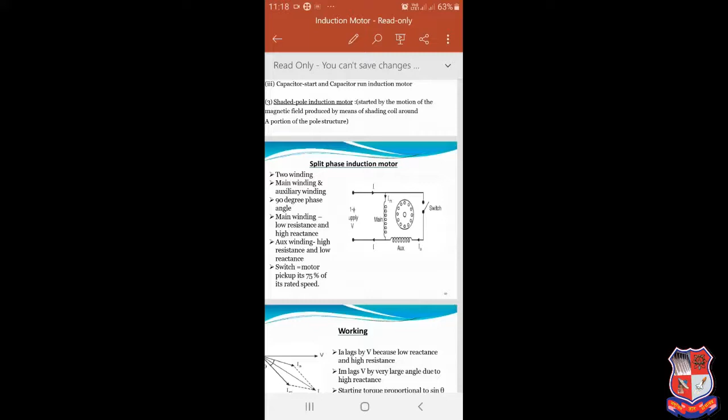The main winding is permanently connected during the operation of the machine, while the auxiliary winding is disconnected after reaching 75% of the rated machine speed. That means when the machine reaches 75% speed, the auxiliary winding is removed with the help of the switch.

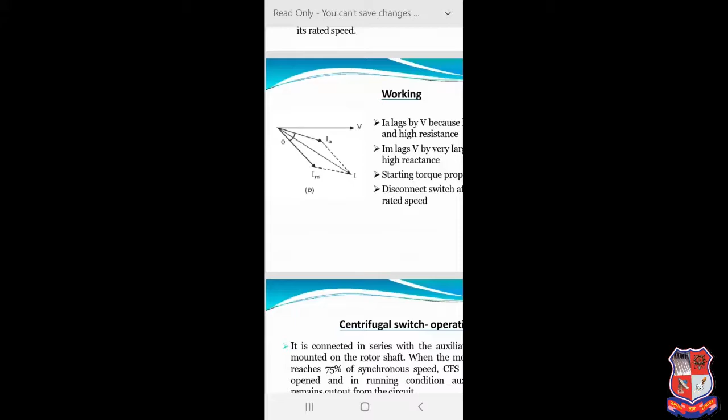Now here you can see the phasor diagram. The IA current, that is the auxiliary current, lags the voltage V slightly because of the low reactance and high resistance. IM lags V by a very large angle due to the high reactance. The starting torque is proportional to sin theta.

The disconnect switch opens after the speed reaches 75% of the rated speed. That is the centrifugal switch operation, as I told you. Now the characteristics of the split phase induction motor.

The starting torque is 1.5 to 2 times the full load torque. Starting current is 6 to 8 times the full load current. Operating power factor is 0.55 to 0.65. Here you can see the power factor of the induction motor is low compared to other motors.

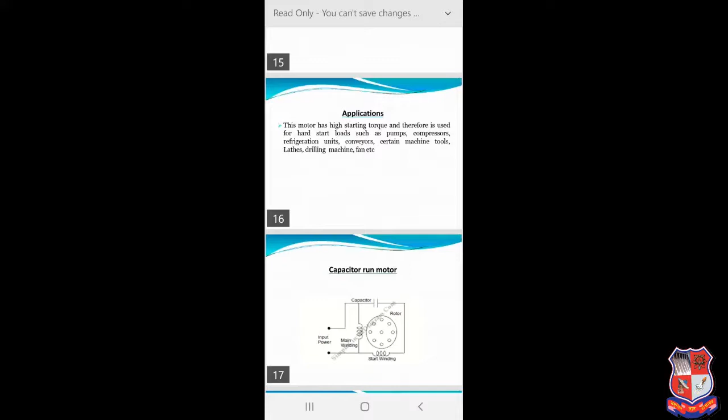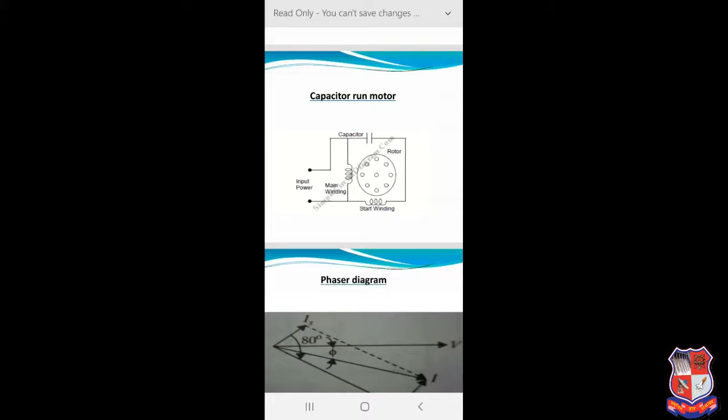Now the third type is the capacitor run motor. Capacitor run motor, you can see the diagram. The difference between the capacitor start motor and capacitor run motor is that in this motor the capacitor is continuously connected during the working of the motor. The capacitor is connected in series with the auxiliary winding.

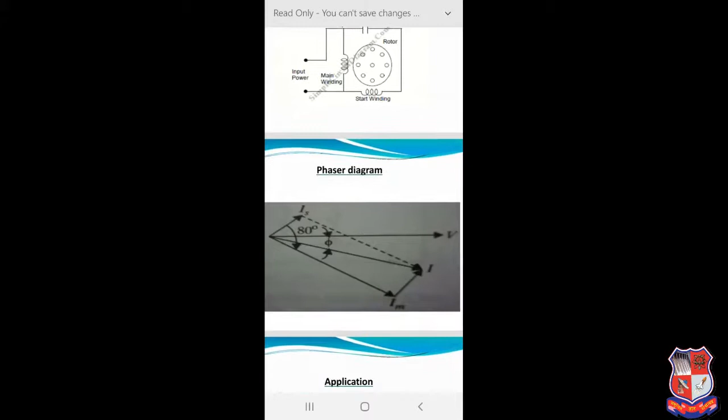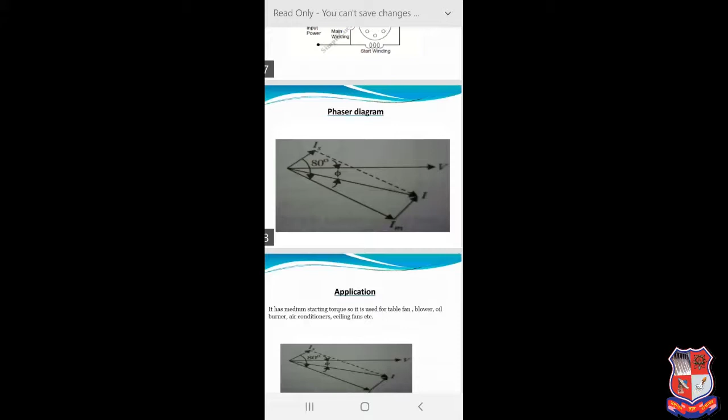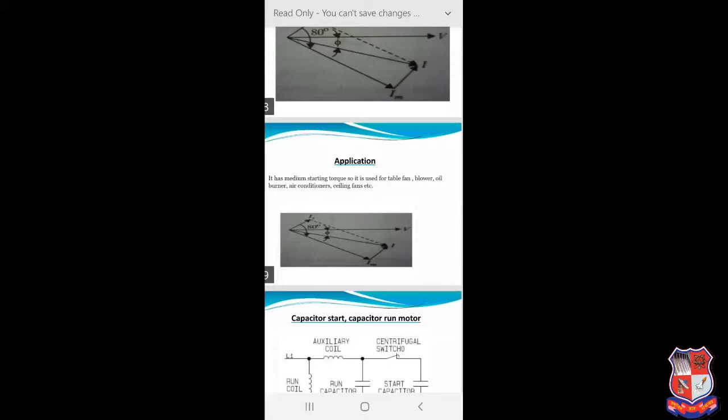Here you can see the phasor diagram. The starting winding current leads the voltage, and the main winding current lags the voltage. The angle difference between IS and IM is approximately 80 to 90 degrees. Now the application of this machine: it has a medium starting torque, so it is used for table fan, blower, oil burner, air conditioner, ceiling fan, etc.

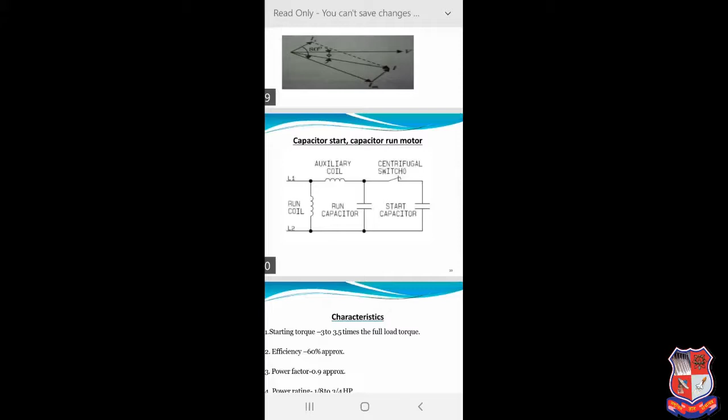Now the fourth type is the capacitor start, capacitor run induction motor. You can see the connection diagram. Here we use two capacitors: one for the starting purpose and another for the running purpose.

The characteristics of this motor: the starting torque is 3 to 3.5 times the full load torque. The efficiency is 60%. Power factor is approximately 0.9. So by using two capacitors, we can improve the power factor of the induction machine. The power rating is 1/8 to 3/4 HP. Pull out torque is up to 60% of the rated torque.

Now the applications: it combines the advantages of the capacitor start and the permanent capacitor motor, and it is used for hard to start loads such as compressor, refrigerator, pump, conveyor, etc. These motors are often employed where quiet operation is required, such as in hospitals, studios, etc.

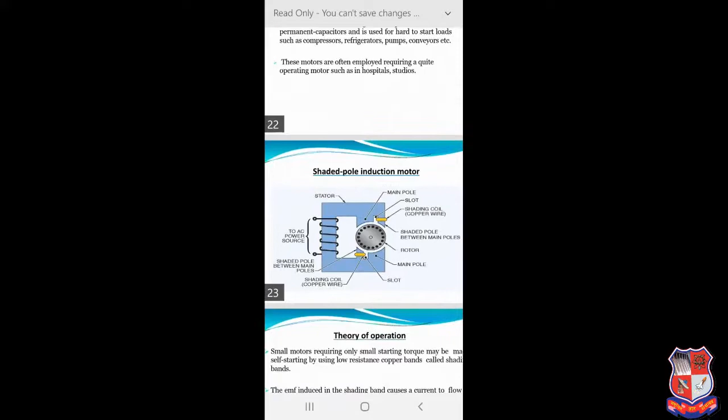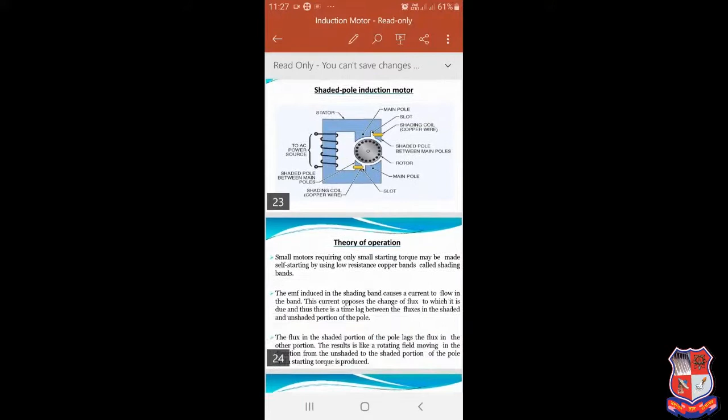Now the fifth and last type of machine, that is the shaded pole induction motor. You can see the diagram over here. In the shaded pole induction motor, a small motor requiring only a small starting torque may be made self-starting by using a low resistance copper band called a shading band. The EMF induced in the shading band causes a current to flow in the band. This current opposes the change of flux to which it is due.

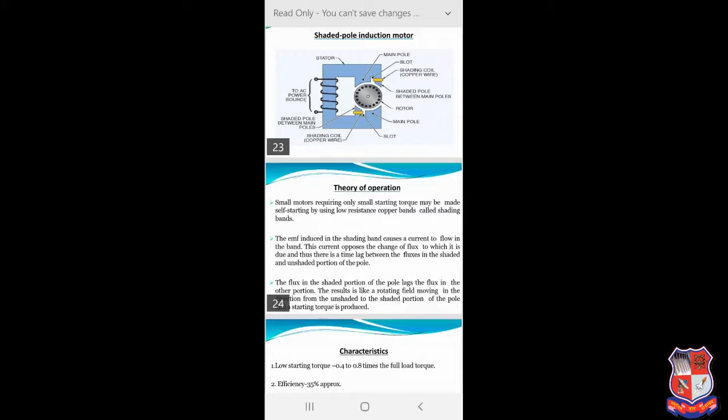Thus there is a time lag between the flux in the shaded and unshaded portions of the pole. The flux in the shaded portion of the pole lags the flux in the other portion. The result is like a rotating field moving in the direction from the unshaded to the shaded portion of the pole, and starting torque is produced, so the rotor can rotate.

The characteristic of the shaded pole induction motor is that it has a low starting torque, about 0.4 to 0.8 times the full load torque. The efficiency is very low, approximately 35%. The power factor is 0.45. Pull out torque is 50% of the full load torque, and the power rating is 1/300 to 1/20 HP.

Now the application of the shaded pole induction motor. Because of their poor starting torque, low power factor and poor efficiency, such motors are only suitable for low power applications such as toys, portable fans, electric clocks, hair dryers, slide projectors, and small business machines such as photocopying machines, vending machines, advertising displays, etc.